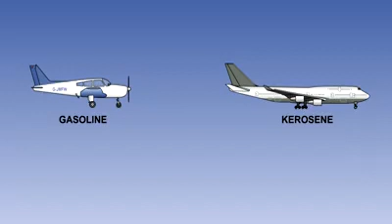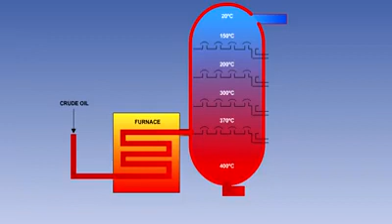In simple terms, the required fuel is extracted from the crude oil by a distillation process. The oil is boiled in a furnace, and then the oil vapor is cooled in a distillation column. The various hydrocarbons in the oil all have different boiling points, so they condense out of the vapor and are tapped off at different points in the column.

The heavy oils condense out first and are collected near the bottom. The process then continues up through the tower, with kerosene and gasoline, which are relatively light and volatile, being taken out near the top.

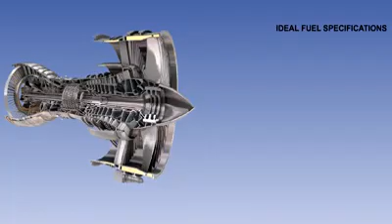The specification for an ideal fuel for either a gas turbine engine or a piston engine includes the following main requirements. It should flow easily under all operating conditions. It should have complete combustion under all conditions.

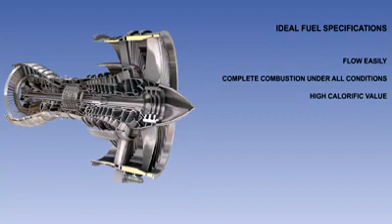It needs to have a high calorific value. The calorific value is a measure of the amount of heat released during its combustion. It is measured in British thermal units per pound or kilojoules per kilogram.

It should be non-corrosive. There should be no damage to the engine from combustion byproducts. The fuel should present a low fire hazard.

Engines should start easily, and the fuel must be able to lubricate the moving parts of the fuel pumps and other components in the system. In practice, the cost of satisfying all these criteria is prohibitive, and therefore compromises have to be made.

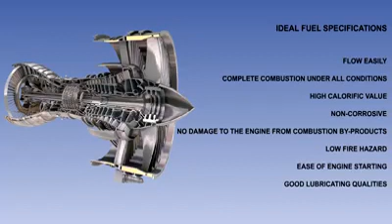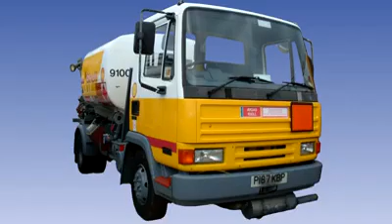Piston-engined aircraft use gasoline fuels grouped under the title Aviation Gasoline, or Avgas. Aviation gasoline is manufactured to conform with the exacting specifications that are issued in the United Kingdom by the UK Aviation Fuels Committee on behalf of the Defence Material Standardisation Committee.

The specification number for gasoline is Defence Standard, or DEFSTAN, 91-90.

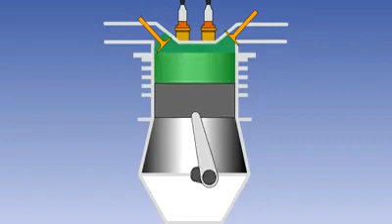Aviation gasoline is graded by octane rating. The octane rating of a fuel is a measure of the fuel's resistance to detonation when subjected to high temperature and pressure.

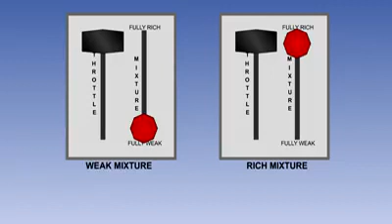A fuel's octane rating is checked in a test engine with the fuel-air mixture weak and with it rich. This gives the fuel two octane ratings. The weak figure is used in the fuel's name. So, for instance, Avgas 100 is a 100-octane fuel when the mixture is weak, but a 130-octane when the mixture is rich.

These two octane ratings are known together as the fuel's performance number, or index, so Avgas 100 has a performance index of 100-130.

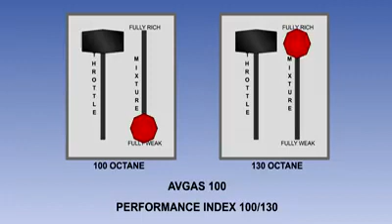High-performance engines with high compression ratios require high-octane fuel. Engines with lower compression ratios can use lower-octane fuel.

The grades of aviation gasoline currently authorized and available are Avgas 100 and Avgas 100LL.

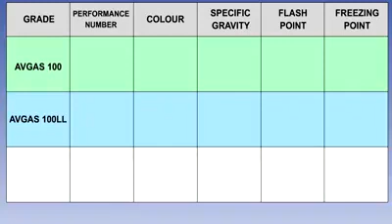Avgas has a freezing point in the region of -58°C, and a flash point, which is the temperature at which the fuel vapor will ignite in contact with a flame, of -40°C or colder. It has a specific gravity of 0.72 at 15°C.

Specific gravity is important, as fuel is delivered by volume, but pilots need to know its mass or weight, as the energy available from the fuel is dependent on its mass, not its volume.

Avgas 100 is coloured green and has a performance number of 100-130.

Avgas 100LL has the same performance number as Avgas 100, but it has a lower lead content. It is coloured blue.

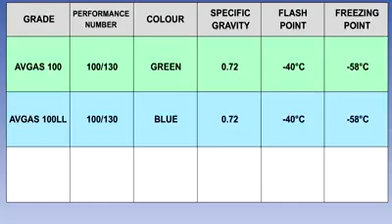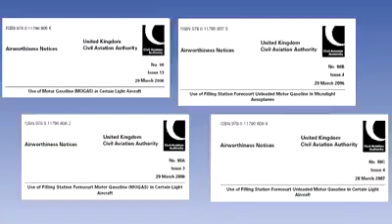MoGas, or motor gasoline, can sometimes be used in certain airframe engine combinations, but only under the conditions specified in Civil Aviation Authority Airworthiness Notices No. 98, 98A, 98B and 98C.

Because of the higher volatility and water content of MoGas, carburetor icing and vapor locking are much more likely to occur if this fuel is used. The subjects of carburetor icing and vapor locking are covered in detail in the piston engine series of lessons.

Information and advice on the use of MoGas can be found in the CAA Safety Sense Leaflet No. 4B.

Diesel piston engines use AVTUR. This fuel is described in the gas turbine engine fuel section.

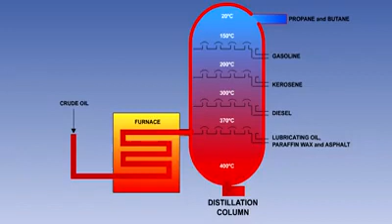Gas turbine engined aircraft use kerosene fuels. These are heavier and less volatile than gasoline fuels. They are placed between gasoline and diesel fuel in the distillation process.

The two main types of gas turbine fuel in use in civilian aircraft are aviation turbine fuel, or AVTUR, and aviation turbine gasoline, or AVTAG. As with aviation gasoline, in the United Kingdom, the specifications for these fuels are issued by the UK Aviation Fuels Committee on behalf of the Defence Material Standardisation Committee.

There are two grades of AVTUR in use. Jet A1 is used in Europe and most of the rest of the world, whilst Jet A is used in the United States of America.

Jet A1 is a kerosene-type fuel, with a nominal specific gravity of 0.8 at 15 degrees Celsius. It has a flash point of 38.7 degrees Celsius and a waxing point of minus 50 degrees Celsius. Waxing is explained later in the lesson.

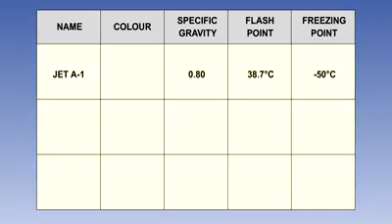Jet A is a similar type of fuel to Jet A1, but it has a waxing point of minus 40 degrees Celsius. Gas turbine fuels are not dyed for identification. They retain their natural colour, which can range between what is termed as water clear to a straw yellow.

AVTAG is known in civil aviation as Jet B. It is not generally used in civilian aircraft. It is a gasoline and kerosene mix with a nominal specific gravity of 0.77 at 15 degrees Celsius.

It has a flash point of minus 20 degrees and a waxing point of minus 60 degrees Celsius. Because of the very low waxing point, it may be found in use at a small number of civil airfields in very cold climates.

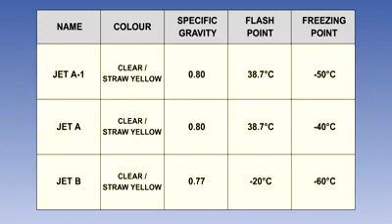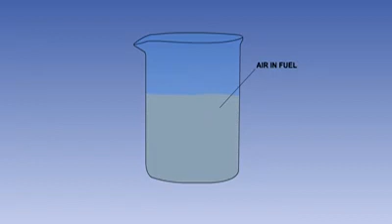If a fuel sample is placed in a clear glass container and swirled vigorously, and the sample appears cloudy or hazy, then there could be one of two reasons for this. If the cloudiness appears to rise quite rapidly towards the top of the sample, then air is present. But if the cloud falls quite slowly towards the bottom of the sample, then water is present in the fuel.

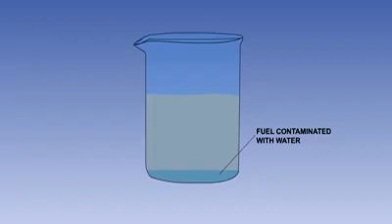Having said that, a cloudy appearance usually indicates the presence of water. A certain amount of water is present in all fuel. The water, which is dissolved in the fuel, gives rise to a number of fuel system problems.

As an aircraft climbs to altitude, the fuel is cooled and the amount of dissolved water it can hold is reduced. Water droplets form, and as the temperature is further reduced, the droplets turn to ice crystals, which can block fuel system components such as filters.

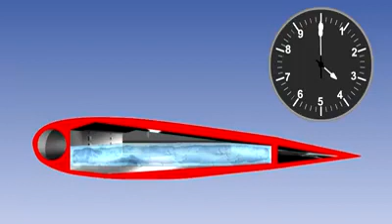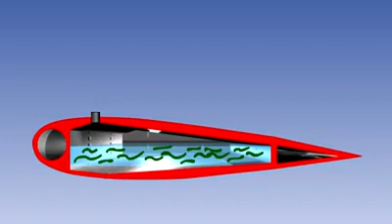A microbiological fungus, called Cladosporium resinae, is present in all turbine fuels. This fungus grows rapidly in the presence of water to form long green filaments which can block fuel system components. The waste products of the fungus are corrosive, especially to fuel tank sealing substances.

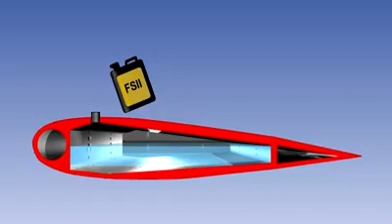The inclusion of a fuel system icing inhibitor, or FSII, in the fuel will help to overcome these problems. The inhibitor in common use inhibits the ability of the water in the fuel to freeze and acts as a pesticide which retards the growth of the fungus in the fuel. Jet A1 has FSII, but Jet A does not.

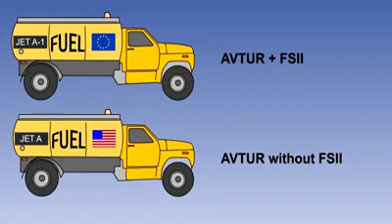As we have already said, water is always present in fuel. The amount will vary according to the efficiency of the manufacturer's quality control and the preventative measures taken during storage and transfer. Further measures can be taken to minimize water accretion once the fuel has been transferred to the aircraft tanks.

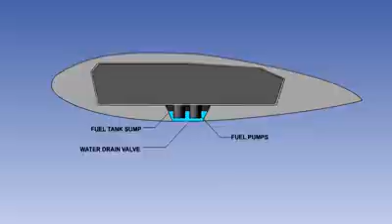If the fuel can be allowed to settle after replenishment, then the water droplets, being heavier than the fuel, will fall to the bottom of the tank and can then be drained off through the water drain valve, which is situated in a sump in the lowest part of the fuel tank.

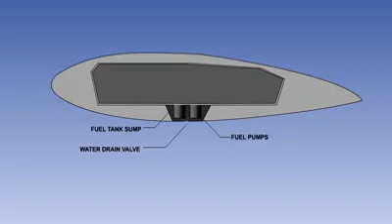Once the fuel is in the aircraft tanks, the main source of water contamination is the atmosphere that remains within the tank. If the tanks are topped up to full, then the atmosphere is excluded together with the moisture it contains, thus minimizing the likelihood that fuel will be contaminated.

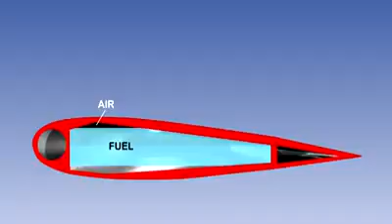Caution is required here. Filling up the tanks may prove an embarrassment later if the ambient temperature rises, as the fuel in the tanks will expand, and there is a danger it may spill out of the vent system.

Filling the fuel tanks may also incur a performance penalty, as the aircraft may be too heavy to take off with the required passenger or cargo load, and some fuel may have to be removed.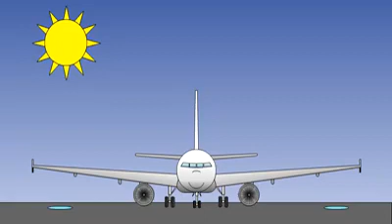As a further precaution, in order to prevent any ice crystals blocking fuel filters and jets, the fuel may be passed through a fuel heater located on the engine, which uses hot air from the engine compressor to remove any ice crystals which may have formed in the fuel when it's cooler than 0 degrees Celsius.

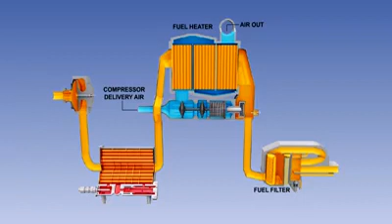Some systems utilize a fuel-cooled oil cooler as well as or instead of a fuel heater. The fuel-cooled oil cooler uses the hot engine oil to warm the fuel and in doing so produces the added benefit of cooling the oil.

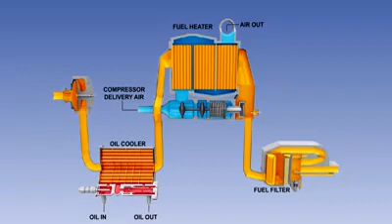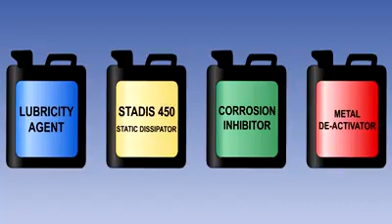A number of additives may be blended into the fuel, either at the refinery or the airfield, to improve the operating ability of the fuel.

A lubricity agent is added to the fuel to reduce wear in moving parts of the fuel system components.

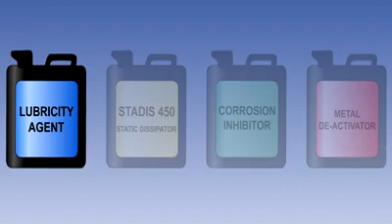Static dissipator additives partially eliminate the hazards of static electricity generated by the movement of fuel through modern fuel transfer systems. This would otherwise be a particular problem with the high flow rates generated during refueling and defueling.

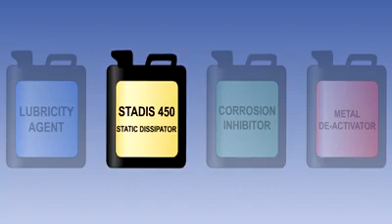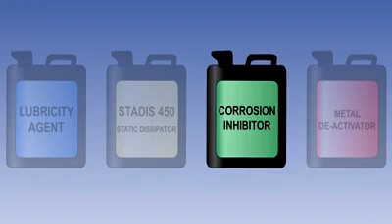Corrosion inhibitors protect ferrous metals in fuel handling systems, such as pipelines and storage tanks, from corrosion. Certain of these corrosion inhibitors improve the lubricating qualities of some gas turbine engine fuels.

Metal deactivators suppress the tendency which some metals, particularly copper, have to cause the fuel to oxidize.

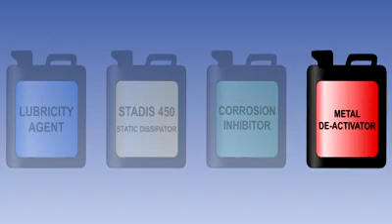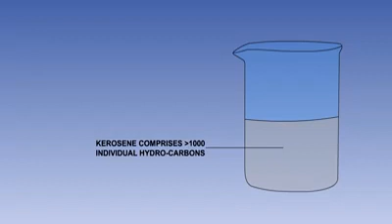We are now going to talk about fuel waxing. This is something that happens to fuel when it is extremely cold. Do not confuse this with the water in the fuel freezing. Gas turbine fuel consists of many hydrocarbons, each with its own freezing point, so it doesn't become a solid at one temperature in the same way that water does.

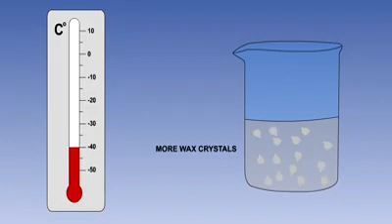As the temperature of the fuel drops, the heavy hydrocarbons, which have the highest freezing point, freeze first and form wax crystals. As the temperature drops further, the hydrocarbons with slightly lower freezing points start to solidify, and so on as the temperature continues to fall.

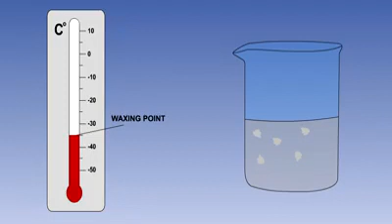The waxing point of a fuel is the temperature at which wax crystals begin to form. Jet A1 has a waxing point of -50 degrees Celsius, so waxing is only a problem for aircraft operating for prolonged periods at high altitude in very low temperatures.

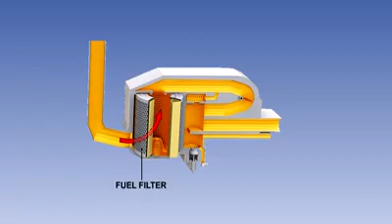The crystals can clog the fuel filter and interfere with the operation of the engine fuel control unit. The effects of waxing can be minimized by the refinery keeping the heavy hydrocarbons in the fuel to a low level.

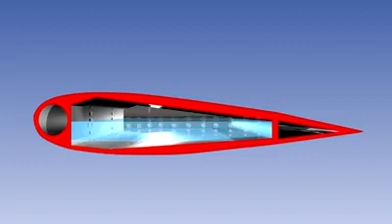The temperature at which a liquid boils will reduce as the pressure on its surface reduces. As an aircraft climbs, the pressure on the surface of the fuel reduces, and with that reduction comes an increased likelihood that the fuel will boil and form vapor in the pipelines.

The vapor locks that this effect causes can cut off the fuel supply to the engine, with the result that the engine will stop.

Fuel booster pumps fitted inside the tanks can help to overcome this problem by pressurizing the fuel in the pipelines from the tank to the engine, pushing fuel towards the engine rather than engine-driven pumps sucking fuel from the tanks and further reducing the pressure.

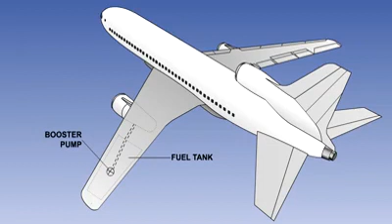Specific gravity, or SG, is defined as the ratio of the density of a given solid or liquid substance to the density of water.

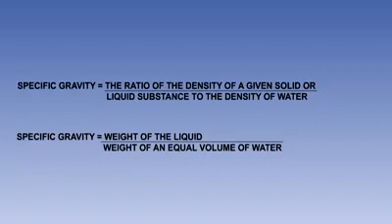Or, to put it more simply, it is the weight or mass of the liquid divided by the weight or mass of an equal volume of water.

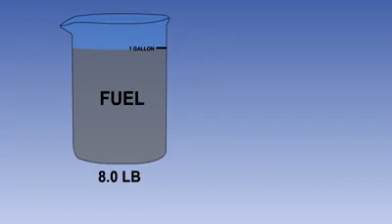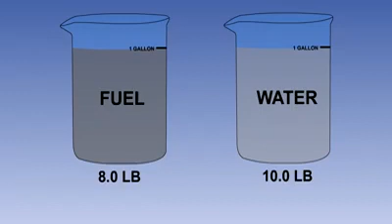So in the example shown here, we have 1 gallon of fuel in the left container, and it weighs 8 pounds. In the right container, there is an equal volume, 1 gallon of water, and it weighs 10 pounds. The specific gravity of the fuel is then 8 divided by 10, or 0.8.

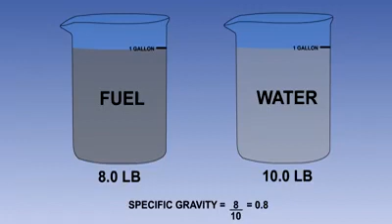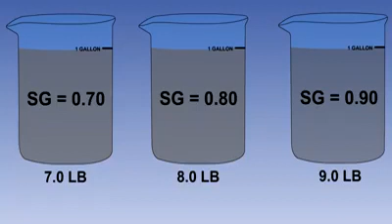Specific gravity has no dimensions. The higher the specific gravity of a fuel, the greater will be the mass or weight of fuel for a given volume. Conversely, the lower the specific gravity, the less will be the mass or weight for any given volume.

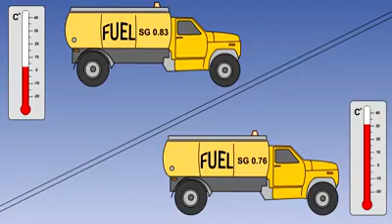The specific gravity of fuel varies inversely with its temperature, so, depending on the storage conditions, the specific gravity of the fuel supplied to an aircraft may be different from the standard value. On modern aircraft fuel systems, this usually makes little difference, as fuel in the aircraft tanks is measured in mass or weight rather than volume, with the fuel quantity measuring system compensating for changes in fuel specific gravity.

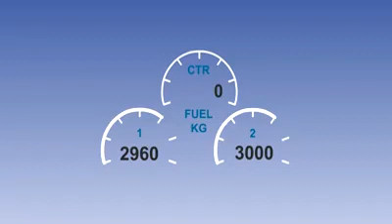However, if a high fuel load is required, it may not be possible to get sufficient volume of fuel on board for the required mass if the specific gravity of the fuel is low.

Remember that ice crystals formed from water in the fuel are prevented from blocking the fuel filter by heating the fuel upstream of the filter using either hot air or oil.